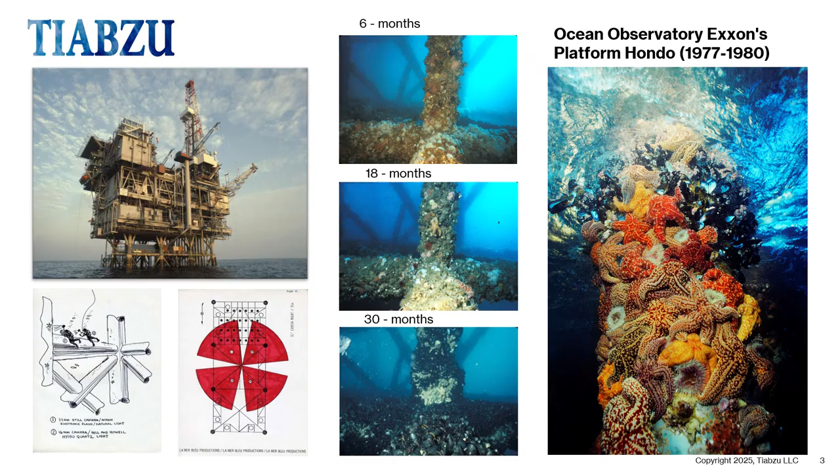Watching a reef form on time lapse, we could add up the benefits of this valuable resource. In 1983, with a Saltonstall-Kennedy matching grant from NOAA, my team, the Mussel Company, successfully harvested and canned mussels, demonstrating the commercial viability of repurposing offshore infrastructure for aquaculture.

Atlantic Richfield funded Man-Made Oasis, a multimedia presentation showcased at the Cabrillo Marine Aquarium in Los Angeles for decades. It introduced the world to offshore platforms as artificial reefs, sparking new perspectives on their ecological benefits and alternative uses.

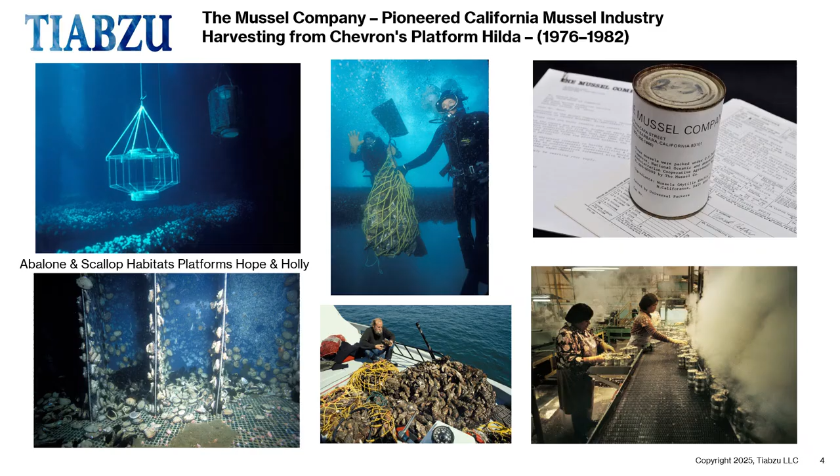In 2015, Santa Barbara was in the midst of a severe drought. I was reading about the restart of the local community desal plant. I understood the process and its history. I wondered, why not operate subsea and use the natural pressure of the ocean for desalination? This would reduce energy demands and the environmental impact.

As much as 40% of the energy cost for desalination is not only for reverse osmosis, but also to power the high-pressure, high-flow pumps that move as much as 5 times the amount of seawater as fresh water through intake and pretreatment. Preosmotic filtering removes marine life and coastal particulate matter from the seawater. The residual brine concentrate is not only saline-rich, but also includes the remains of this biomass. This biochemical cocktail is discharged back into sensitive coastal waters.

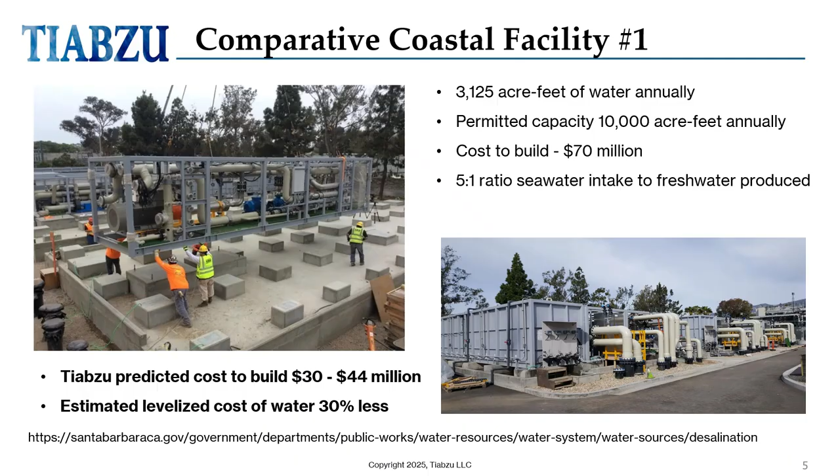Phytoplankton is among the marine life entrained by intake and impacted by brine discharge. Phytoplankton concentrates along coastal zones. It is the base of the aquatic food chain and a primary source of more than half of the oxygen on the planet, releasing more O2 than all plants on land combined.

Phytoplankton also absorbs CO2, which is delivered to the deep ocean depths when the life that feeds upon the carbon-rich phytoplankton descends. This is part of diel vertical migration, a natural carbon sequestration that cycles from surface to a depth of 900 feet every 24 hours. DVM is a planetary climate regulating process that can be adversely impacted by nearshore seawater intake and discharge.

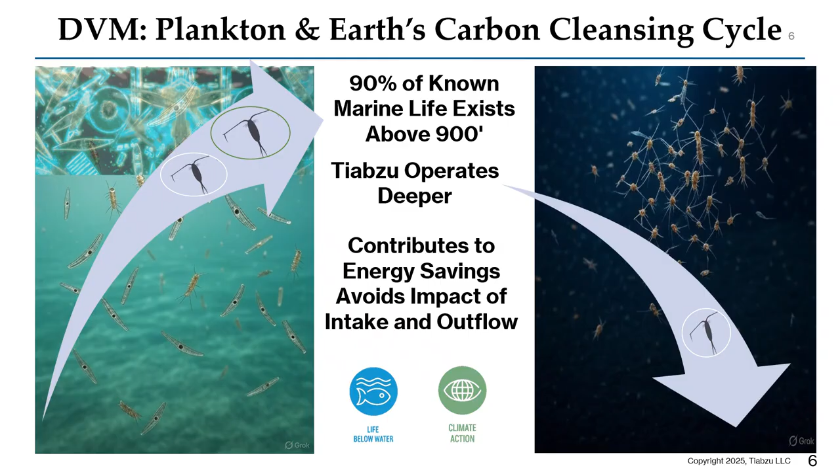Operating subsea, high-pressure, high-flow pumps are required only for delivery of purified water from depth to surface or shore. Pumping only the product, the purified water, and not the product source, the seawater, lowers overall energy requirements by as much as 40%. Contributing to energy savings is removing multi-pump pre-osmosis by operating below the ocean's most biologically productive zone.

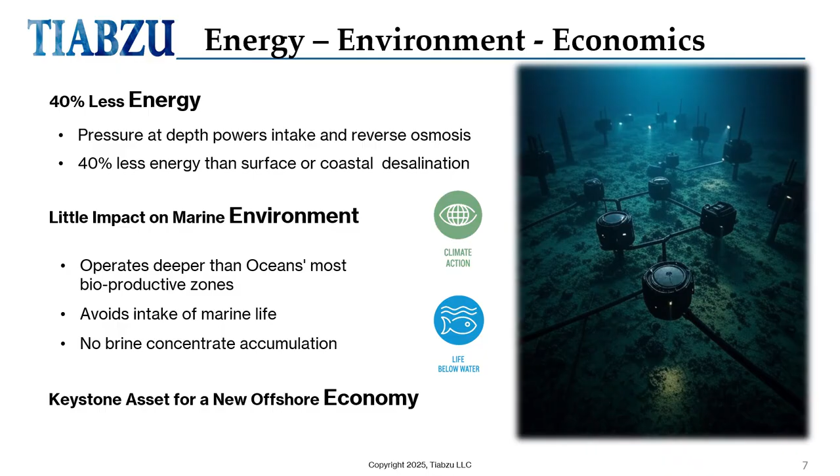Contemplated depths avoid the impact of desalination on phytoplankton, the marine carbon cycle, and potential negative feedback on climate perturbation that these systems can cause. And no one wants one of these obstructing the ocean view from their Malibu estate.

Approximately 50% of the implementation costs for the Carlsbad, California facility is attributed to the regulatory process and mitigation efforts. NIMBY delays implementation for years and chalks up hundreds of millions in front-end costs. The assumption is that the removal of the environmental impacts from intake and discharge, as well as competition with high-value coastal real estate, will lower that price tag.

We pulled in our favorite engineer, Ryan Elliott. We hired a team of process, structural, mechanical, chemical, and reverse osmosis engineers at IDI in Knoxville, Tennessee, to design the Tiabzu system. Hi, I'm Ryan Elliott, mechanical ocean engineer, diver, and licensed professional engineer. I began working with Bob and Suzanne on various projects while in commercial dive school and continued while studying mechanical engineering at Cal Poly San Luis Obispo.

Our collaborations continued after graduation while I worked for other companies on various ocean engineering projects, including subsea power infrastructure, ocean observatories, and subsea sensors for the United States, the United Nations Nuclear Test Ban Treaty Organization, and other customers. I also participated in the installation of these projects as a diver, deckhand, or equipment operator, in addition to the engineering, testing, and equipment assembly phases, giving valuable field experience to incorporate into subsequent designs.

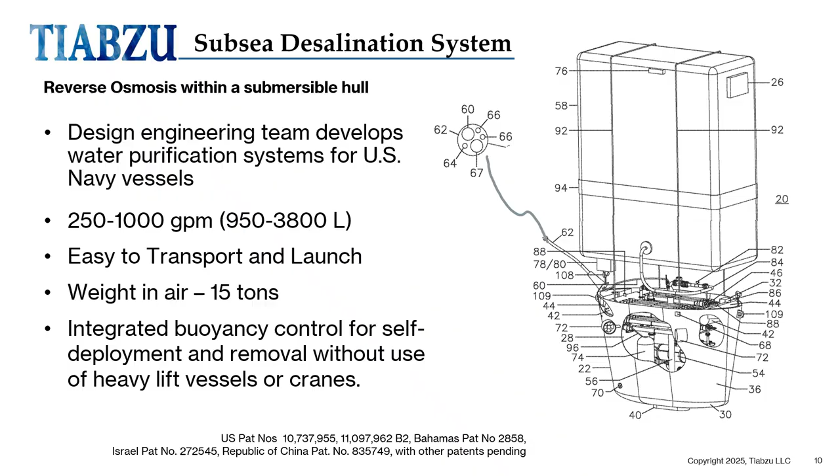This buoyancy system integration is used to facilitate deployment, recovery for maintenance or at end of life, or to position and maintain it at operational depth during mobile operations. For scaled water harvesting fields, the module keel will mate with subsea infrastructure.

The Tiabzu system includes an integrated buoyancy control system analogous to a hot air balloon. Using difference in density between hot internal air and cool external air for its lift, its balloon or bladder provides lift using the approximate 3% difference in relative density between the RO water and seawater.

RO water buoyancy allows safe vertical movement of subsea objects without change in lifting force with depth associated with gas-based methods where buoyant force varies with changes in pressure.

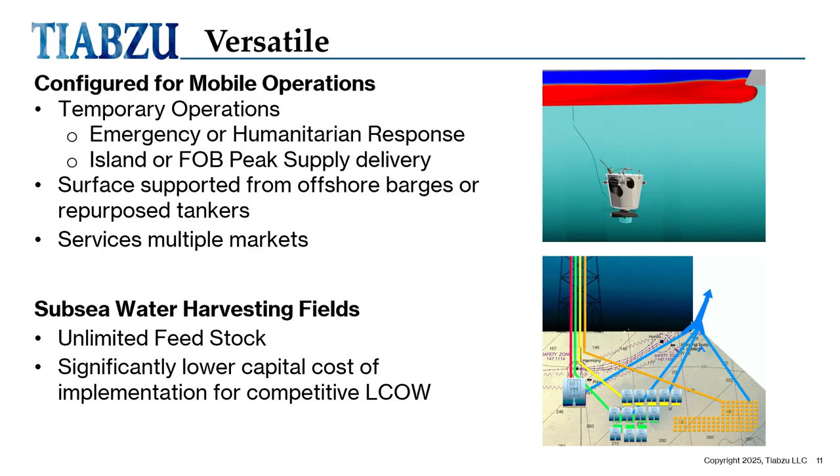Hi, this is Mike Edwards. My oil and gas career spanned 4 decades, beginning as a field landman before various promotions, where I worked in acquisitions, legal, government relations, community and public relations, and finally in investor relations. Besides many years living and working in Santa Barbara, I spent a considerable time on boats in the channel going to and from

platforms. I was also very fortunate to join the UCSB Marine Research Team in a two-person mini sub and saw the abundant sea life on and at the bottom of Platform Gail in 740 feet of water. Approach the repurposing of offshore infrastructure as a collaborative process, working together with owner-operators, leveraging their assets, and having a positive impact on their bottom line.

The Tiabzu system is designed to operate independently without any interference with platform operations. The system is cross-supportive with power supplied from the platform and fresh water supplied to owner-operators. This symbiotic relationship establishes a framework for development and regulation for long-term uses.

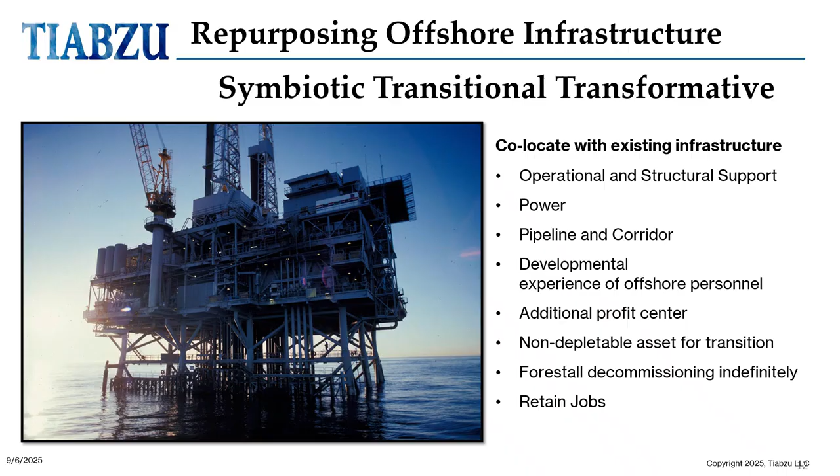This alternative use for the offshore infrastructure provides a transition as conventional productivity declines. And in the case of Tiabzu, as alternative energy sources come online, the possibility of keeping the assets productive for a longer period. This transformation can create a new and sustainable offshore economy.

Our financial models predict a doubling of profits within 5 years of approvals to scale up operations. Subsea desalination produces high returns despite a low commodity price, less than 37 cents a barrel, as compared to oil at $70 per barrel or natural gas at $40 per barrel of oil equivalent.

That price difference is offset by higher production volume of a non-depletable resource, plenty of seawater, coupled with lower energy costs and the efficient design of the Tiabzu system for low capex and its ongoing effect on the LCOW.

Co-development provides the framework for regulatory or independent operations before momentum for decommissioning takes over. The alternative use provides a non-depletable asset for transitions as oil and gas productivity depletes and as other energy sources, wind, solar, hydrogen, wave, come online.

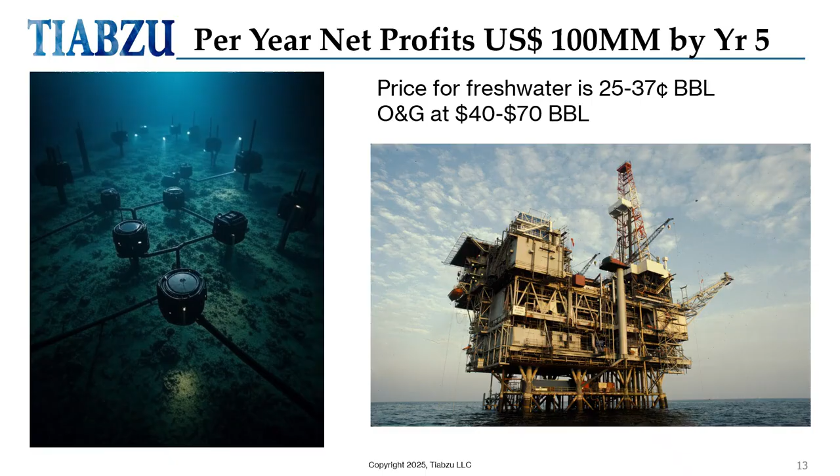I'm Dr. Andrea Neal. I'm the president and founder of Blue Capital. I met Bob and Suzanne back in the day when I was working with Jean-Michel Cousteau and working heavily as a scientific diver. Over the last 20 years, I've led major expeditions across the Atlantic and the Pacific and throughout the Sargasso Sea, as well as accomplished many feats in the waste-to-energy industry, including large-scale industrial production of waste-to-energy facilities.

Today, we're going to go through some of the things about Tiabzu, objectives, pilot scale, and replication of the project. The plan is to deploy a commercial scale system next to a platform and conduct a pilot for a minimum of 6 months to confirm predicted operational efficiencies, energy, environmental, and economic outcomes to de-risk the project for financing and

performance insurance. This de-risking step allows for easier project finance capacity for industrial, commercial, and government clients to include the Tiabzu system in water supply portfolios. The first stage of the pilot will be to saddle a remote operating vehicle with a small-scale desalination system.

The ROV will carry the system to its operational depth and run through the paces to demonstrate system efficacy, operational hours for insurability, and using the generated freshwater as a form of buoyancy for recovering and positioning the module.

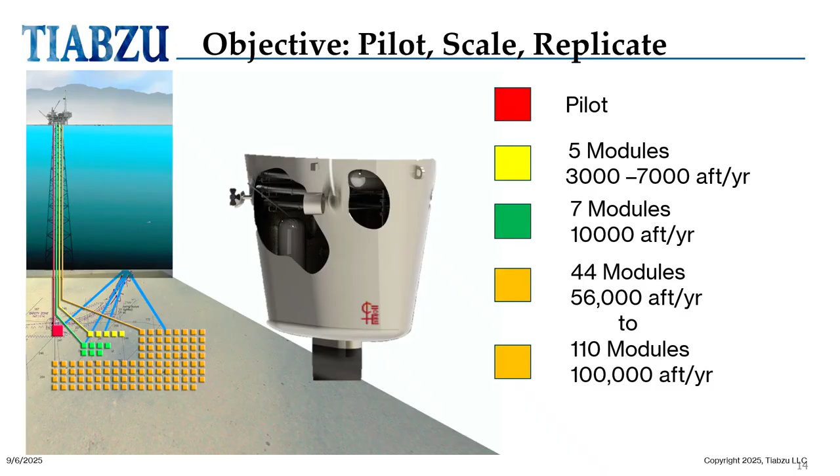The outcome of the 2-hour deep dive discussion on subsea desalination were offers for corporate collaboration with multiple offshore service providers, with the University of Houston joining in.